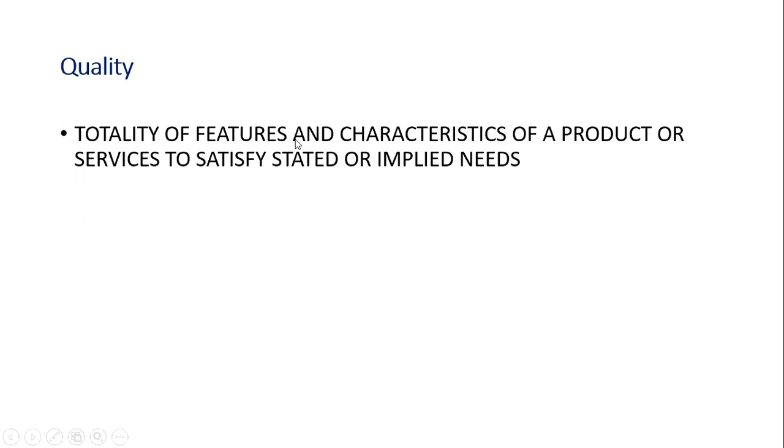So there are two terms we generally use when we talk about quality. One is quality assurance, the other one is quality control. Now let us look at quality assurance. The quality of the product or the service should conform to the customer requirements, and that should be the focal point in managing quality in any organization or project. So what is quality assurance?

The road which we construct should, end of the day, meet the customer requirements. If we have constructed the road but it is not meeting the road user requirements, then we say quality assurance is not there. So quality of a product or service should conform to the customer or road user requirements. And quality was often considered as conformance to the specifications based on detection at the end of production stage.

Means to say, during construction we do n number of tests, and after the tests we conclude that the materials, the mixes or the surface are as per the IRC or MoRTH requirements, hence it's satisfactory. That's how we always tell. But it is not just doing some tests and saying it meets the specification. Quality assurance is beyond that. Ensuring conformance to the specified requirements of IRC and MoRTH through inspection and testing is not the whole requirement, it is beyond that.

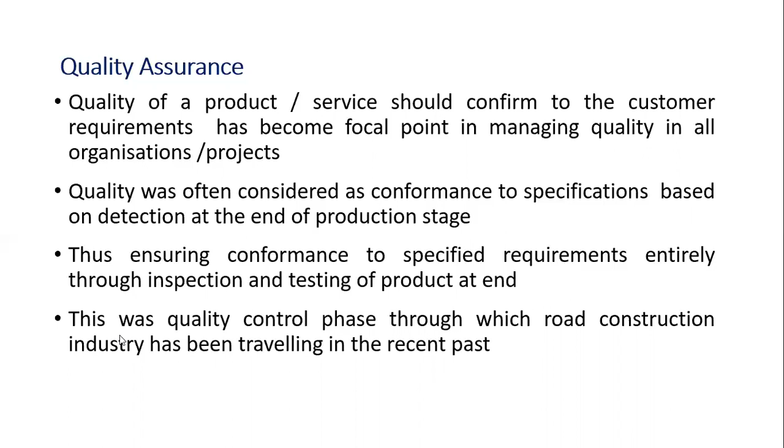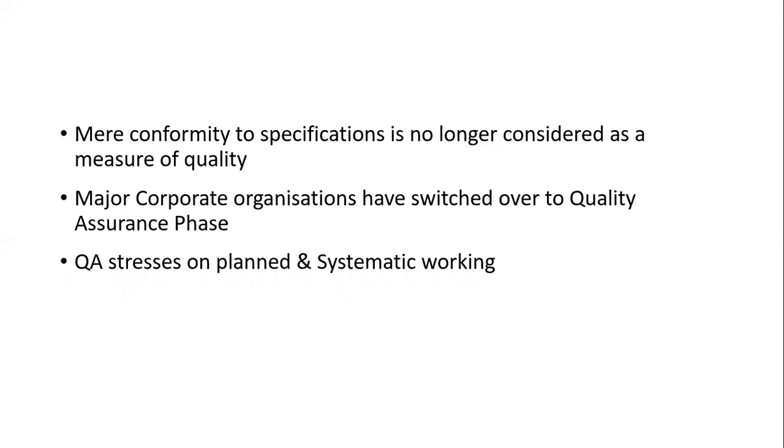If you take the last 10 years or so, we were all doing the tests during construction, which is called quality control. Now it is not so. In current projects we adopt what is called quality assurance. All organizations and projects adopt quality assurance. So what is quality assurance? It stresses planned and systematic working rather than simply relying on some tests and saying the results meet the specified requirements.

Then come the components of a quality system. If you want to implement a quality assurance system, it involves many components. Number one, the supplier's quality policy. There should be commitment of the supplier of the materials, the mixes, the machinery to achieve and sustain the quality of the product to meet the purchaser's needs. Before supplying anything, the supplier should know the purchaser's requirements, whether or not they are in the purchase document or agreement. The supplier should have that quality policy.

You should supply the products and materials based on the purchaser's requirements, meeting his specs. That is very important. The supplier cannot say, because it is not in our agreement or contract, I have not supplied it. So this is one important component of a quality system. There should be commitment from the suppliers, and for that the supplier should have a quality policy.

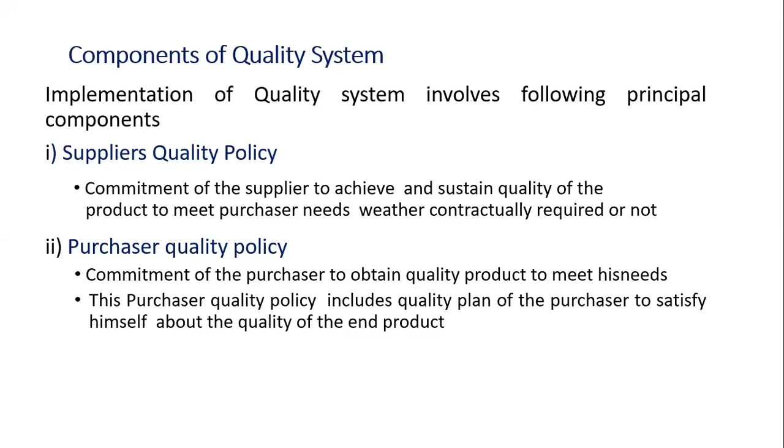And number three, when you look at the components of the quality system, number three is internal quality system. So this quality system includes internal quality systems of all concerned organizations, including quality plan, quality assurance, control of non-conforming products, quality audits, corrective actions.

So, let's say the organization is executing the work. The organization should have the internal quality system. They should have a quality plan, a quality assurance plan, and control over non-conforming materials, mixes, machineries, products. So they should have that control system. By any chance, if a material which is not meeting the requirement is coming to the stockyard, there should be a mechanism to control that. There should be a policy to control that.

And regularly quality audits should be carried out. That should be the system of the organization. And if by any chance some non-quality products or materials are found, there should be mechanisms, policy, a system, a process to take corrective actions within the internal quality assurance system. So if you look at all big organizations today, irrespective of the sector, whether it is the road sector or a software sector or a mechanical factory, they all have an internal quality assurance system.

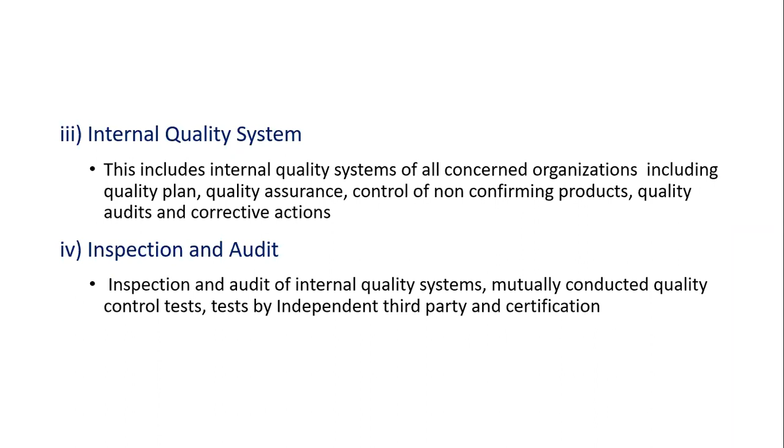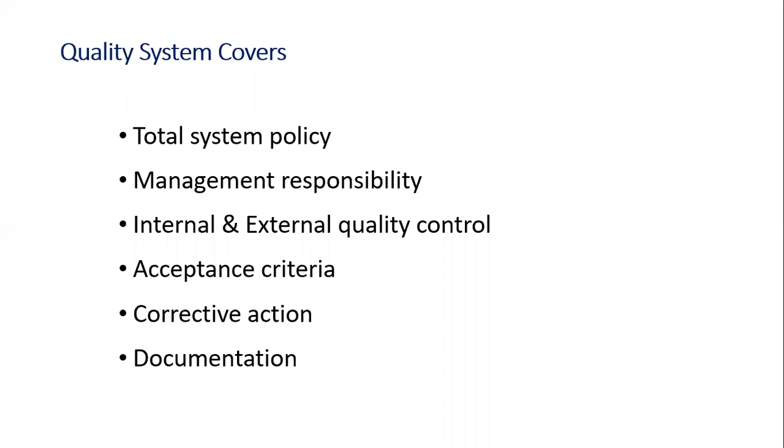The quality system covers the total system policy, management responsibility, internal and external quality control, acceptance criteria, corrective action, documentation. So now let us look at management responsibility. Generally, the general managers and above, the VP, the directors, the managing director, all come under the category of management. What is their responsibility in a quality system? They need to mobilize the resources required, all the money, material, machinery required for the project.

And there should be clear responsibility for all the personnel in the organization. Many times it so happens that responsibilities are not clearly defined, so that will not result in quality work. That's what I also tell many times. While going out, if I tell somebody in general to switch off the light and the fan, we are not sure that the students will switch off the fan or the light. But if I tell somebody specifically, it is assured. So there should be clear responsibility for the personnel.

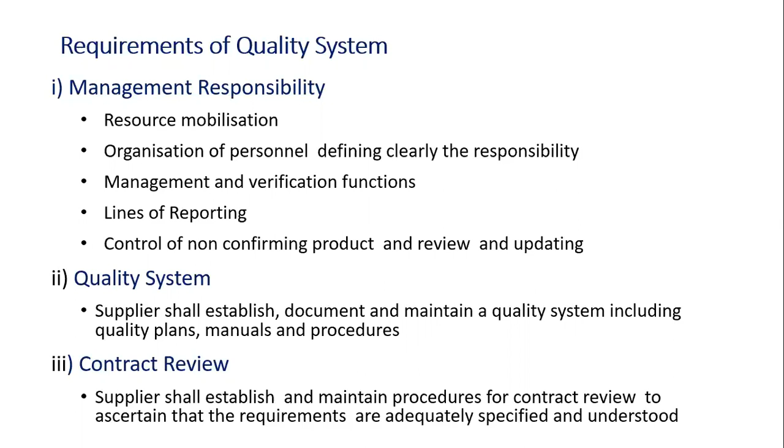Then comes the document and data control. Again, the supplier shall establish and maintain documented procedures to control all documents and data. All the people, especially the executor, the contractor, should have all the documents. He should maintain all the documents, all the procedures and data, so that the tracing will be easy.

Then purchasing. Suppliers shall establish and maintain all the documents to ensure the purchased product conforms to the specified requirements, and evaluation of subcontractors, maintenance of purchasing data, and verification of the purchased product also should be there in the purchasing. So whether it is supplier or the purchaser, all should have the set procedure and they should maintain the documents which convey that the products are meeting the specified requirements, and they should have all the documents for the selection of subcontractors and such things.

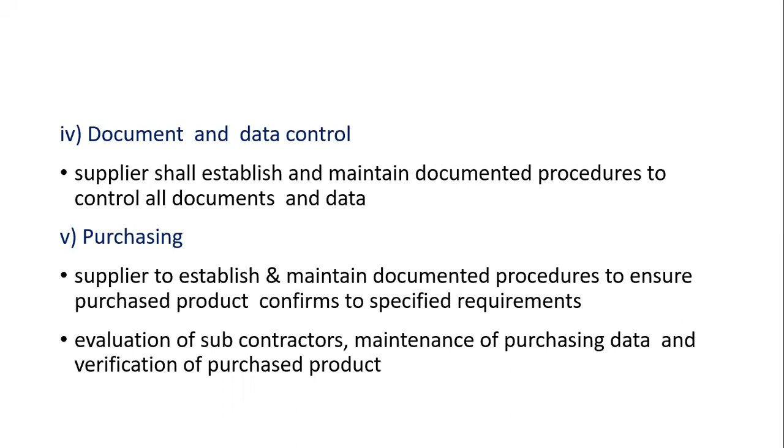So it is not that you can just select a subcontractor without pre-qualifying him. So how did you select him? How did you evaluate your subcontractor? All those documents should be there and they need to be verified. So the project generates huge documents, huge papers.

And if you ask someone in the project, I want the test reports of so and so chainage which was constructed last year in the month of April, the document manager, the HR department should not take more time in tracing the document and giving that document to whoever asked for verification or whatsoever. So if the documents are not clearly identified, tracing will be difficult.

Of course, documentation is important, and in this documentation, identification and traceability is very, very important. Otherwise, even if the document is there, many times it takes a lot of time and tracing becomes very, very difficult. So product identification and traceability are important.

Then comes the process control. The supplier shall identify and plan the production, installation, and the process that directly affect the quality. So the contractor or whoever, he should identify how he is constructing, how he is installing, how he is processing, so that he gets good quality.

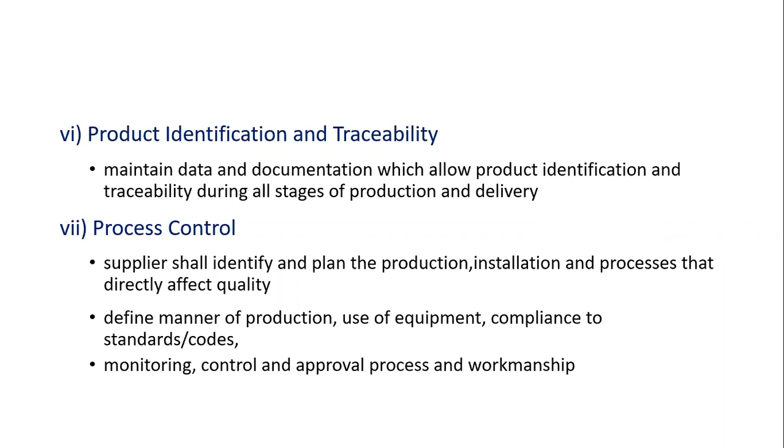So there should be a defined process control, and you should define how the production is carried out, what kind of equipment you use, and how these are meeting the specified standards or codal requirements. So that should be there. Monitoring, control, and approval of process and workmanship should be part of the process control.

Then comes inspection and testing. Establishing and maintaining the documented procedure for inspection and testing of all the activities in order to verify that the specified requirements for the products are met is an important aspect, an important activity that is always carried out.

So incoming product is not to be used prior to inspection and testing. So any material that is incoming to the project site should not be used in the production or in the process unless the testing and approval is over. In exceptional cases, suppose it is urgent and we cannot wait till testing and confirmation is done, it can be identified and recorded.

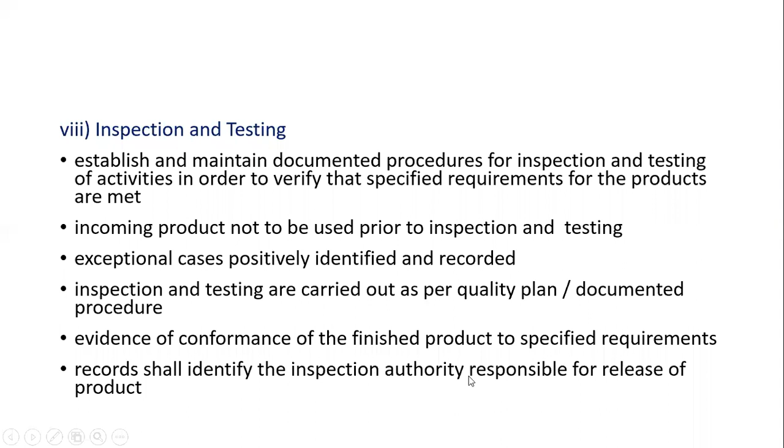So inspection and testing are carried out as per the quality plan of the organization and documented procedure. So there should be evidence of the conformance of the finished product, here our road, to the specified requirement. There should be evidence that the road that we have constructed, the process that we carried out, meets the specified requirements. And there should be records which identify the inspection authority responsible for release of the product.

Then comes control of inspection, measuring and testing equipment. There should be a documented procedure to control, calibrate, and maintain inspection, measuring and testing equipment, to be established and maintained.

So any machinery, materials that we use, we should ensure they are all calibrated and they are all regularly inspected. So these equipments should be kept in good condition and they need to be calibrated at a specified frequency as per the contract agreement or as per the requirements.

So I was telling, the control of non-conforming products is very, very important. Whatever be the quality control measures that we take during construction, during the process of production, still some non-conforming products do pop up.

So we need to have a procedure for non-conforming products, and that should be documented. Let's say we have constructed some layer or we have designed some mix not meeting the requirements. We can always record that this mix design or this layer is not meeting the requirement. So that can be recorded and subsequently action can be taken to rectify that, by reworking to meet the specifications, and there should be a tag: accepted with or without repair, with concession. So there should be a procedure for accepting the product without repair or with repair, and that should be clearly defined.

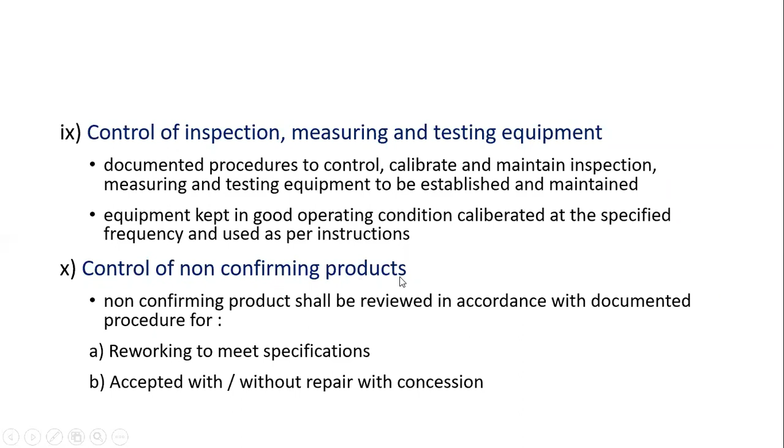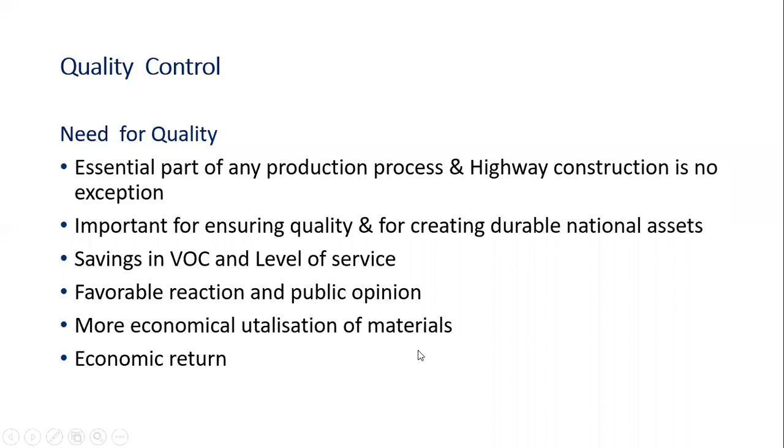So quality control, end of the day, why is it required? What is the need? It is the essential part of any production process, construction process. Highway construction is not an exception. Quality control is important for ensuring quality and for creating durable national assets. Savings in vehicle operation costs and level of service are the benefits we get because of quality control. We also get favorable public reaction and opinion. We are appreciated if there is quality control which results in a good product. Quality control results in more economical utilization of materials, and we also get economical return. So hence quality control is essential.

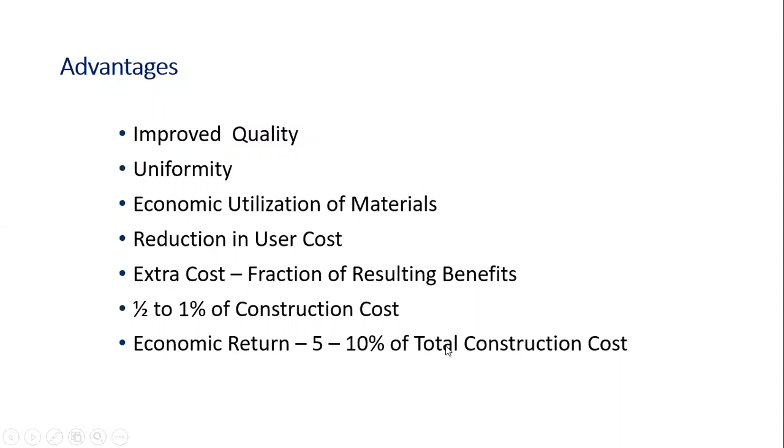So advantages of quality control: improved quality, uniform product, economic utilization of materials, reduction in the user cost. How much are we spending for quality control? Just a very negligible fraction of the cost. So look at the benefits we get, right? The economic return we are likely to get will be 5 to 10% of the total cost.

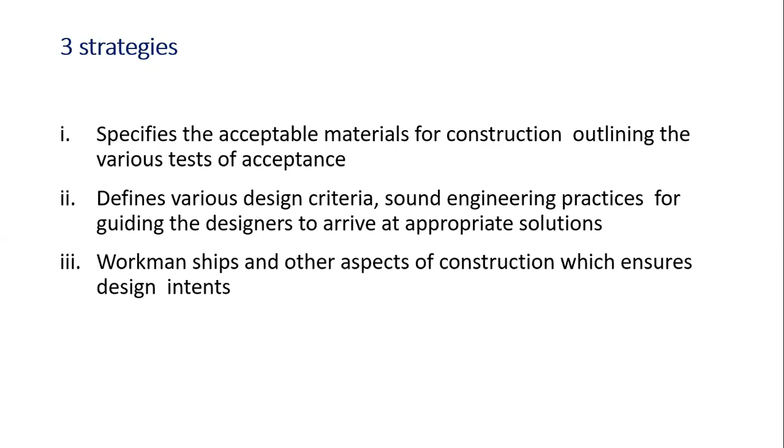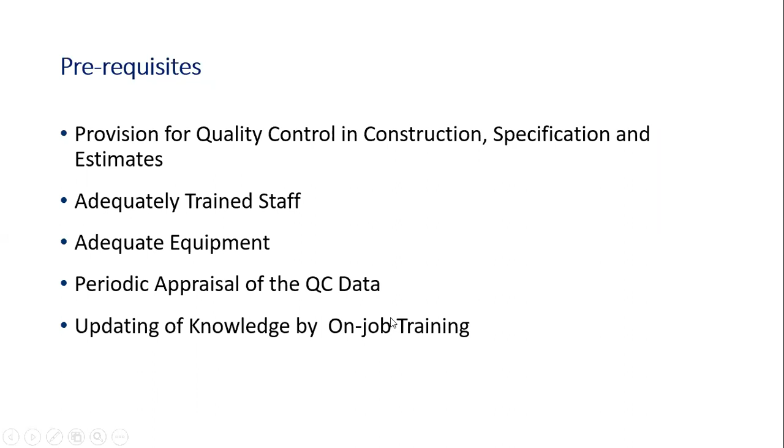To have better quality control in any organization, number one, there should be provision for quality control in construction, in specification, in estimates. There should be adequately trained staff, adequate equipment, and periodic appraisal of this quality control data is very, very important. When this data is analyzed, we learn many things, so that if there are any mistakes, we don't repeat them in subsequent actions. And updating the knowledge is very, very important for quality control.

So what do we do in the quality control of highway construction? We control the materials, we have a set defined procedure, the frequency of tests and the extent of testing, the acceptance criteria, which equipment to be used, what calibration is required, frequency of calibration, recording of test results and training of quality control staff. All these should be there for quality control in highway construction. If you're talking about quality control, that means for all this there is a set defined process and documentation.

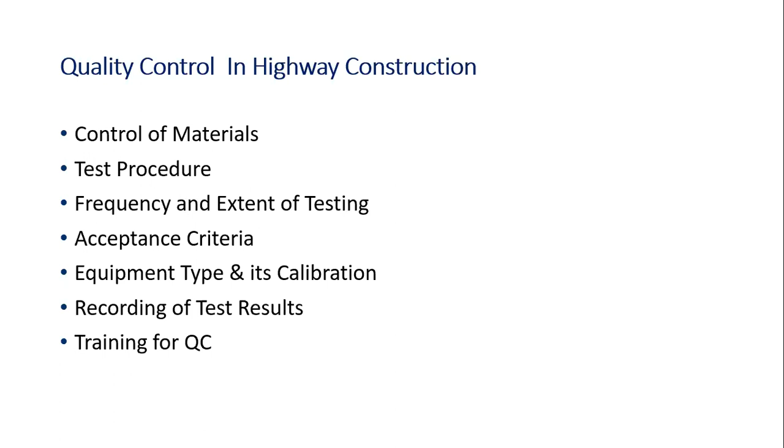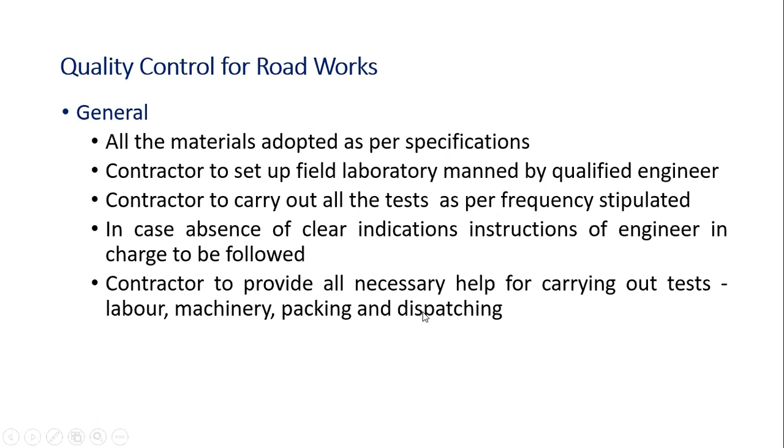So in general, if you look at roadworks, all materials adopted should be as per specification. The contractor should have a field laboratory manned by a qualified engineer. The contractor should carry out all the tests as per the frequency stipulated. In the absence of clear indication, the instruction of the engineer in charge is to be followed, and the contractor is to provide all necessary help for carrying out tests. Subsequent layers are to be started only after obtaining permission from the engineer. Any rectification should be done at the contractor's cost.

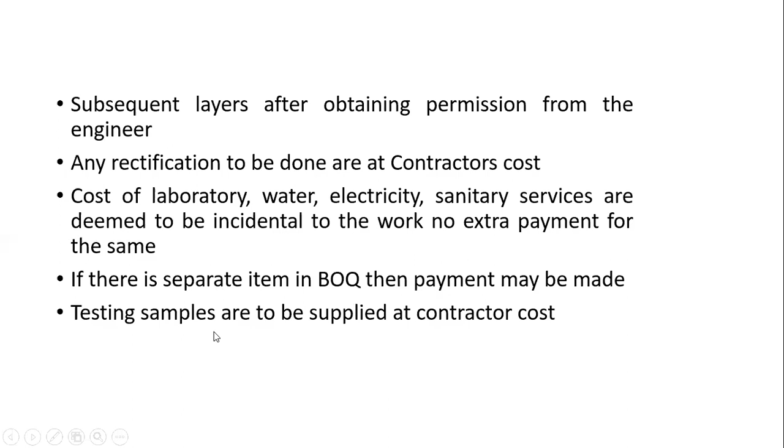Cost of laboratory, water, electricity, sanitary services are always deemed to be incidental to the work. No extra payment is given for the same. If there is a separate item in the bill of quantities, then payment is to be made. Testing samples are to be supplied at the contractor's cost. Cement, bitumen, steel, all these tests are to be carried out and approved before construction.

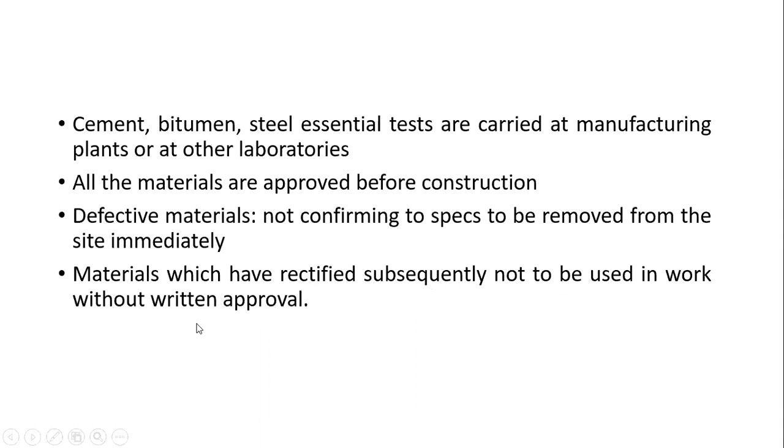Defective materials not conforming to the specification should always be removed from the site immediately. Materials which are rectified subsequently are not to be used in the work without written approval. Imported materials are to be furnished at the time of tenders, and these materials should conform to the relevant specs if not covered in the tender document.